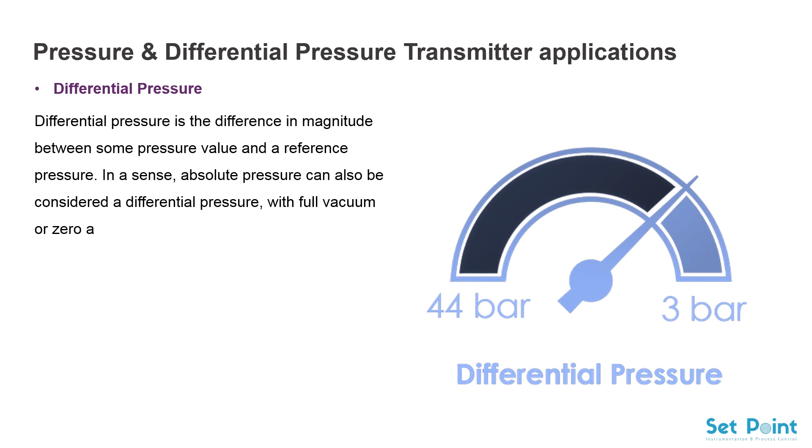Now let's get started. Pressure and differential pressure transmitter applications. Differential pressure. Differential pressure is the difference in magnitude between some pressure value and a reference pressure. In a sense, absolute pressure can also be considered a differential pressure, with full vacuum or zero absolute as the reference pressure. Gauge pressure too can be considered a differential pressure, since in gauge pressure the atmospheric pressure is the reference pressure.

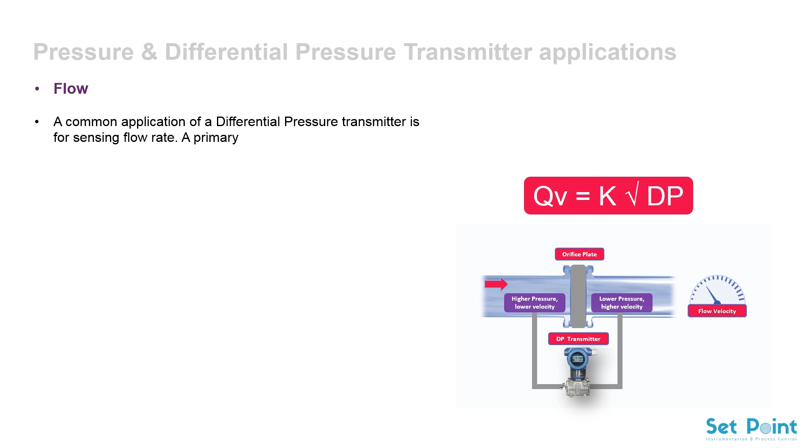Flow. A common application of a differential pressure transmitter is for sensing flow rate. A primary flow element has an internal restriction. This restriction reduces the cross-sectional area of the pipe through which the process flows. This restriction causes fluid velocity to increase as it passes by the restriction. Therefore, fluid immediately upstream from the restriction has a lower kinetic energy, speed, than the fluid immediately downstream from the restriction. This increase in kinetic energy across the restriction is balanced by a corresponding decrease in potential energy, static pressure.

Taps placed on either side of the restriction see a differential in static pressure produced as a result of this decrease in potential energy of the fluid. The differential pressure transmitter subtracts the downstream or lesser pressure from the upstream pressure. This pressure difference is generally quite low, typically from 1-inch water column to 750 inches water column, 0.24 to 186 kilopascals, depending on the fluid and flow rate.

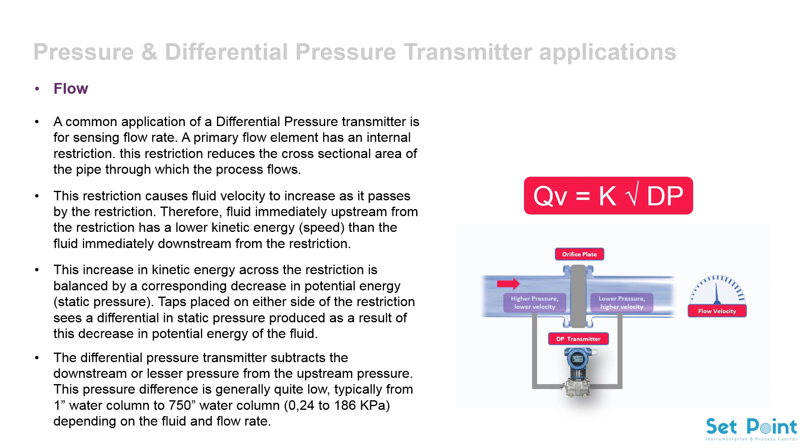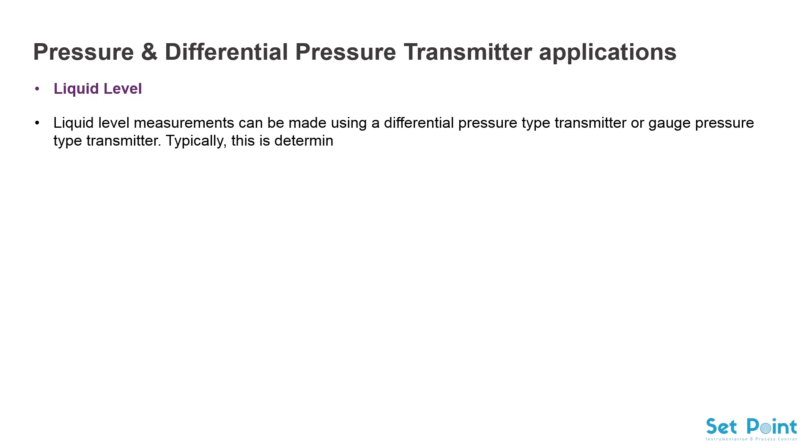Liquid level. Liquid level measurements can be made using a differential pressure type transmitter or gauge pressure type transmitter. Typically, this is determined based upon whether the tank is open to the atmosphere or whether it is closed. Liquid level, open tank. Open tank liquid level measurement means that the tank is open to the atmosphere. In open tank applications, any change in atmospheric pressure affects the process fluid pressure within the tank. In this type of level measurement application, the low side of the transmitter measures atmospheric pressure, thus cancelling out the effects of atmospheric pressure on the tank fluid level. The high side of the transmitter is connected to the tank and thus measures the actual level of fluid in the tank.

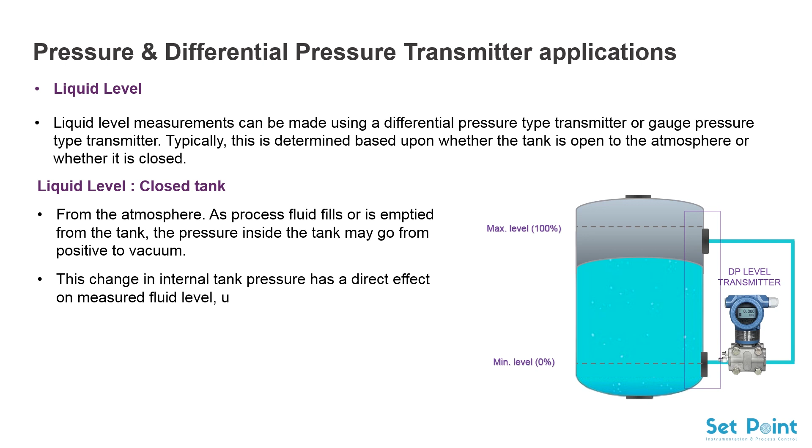Liquid level, closed tank. Closed from the atmosphere. As process fluid fills or is emptied from the tank, the pressure inside the tank may go from positive to vacuum. This change in internal tank pressure has a direct effect on measured fluid level, unless it is compensated for. Piping the low side of a differential pressure transmitter to the top of the tank easily does this.

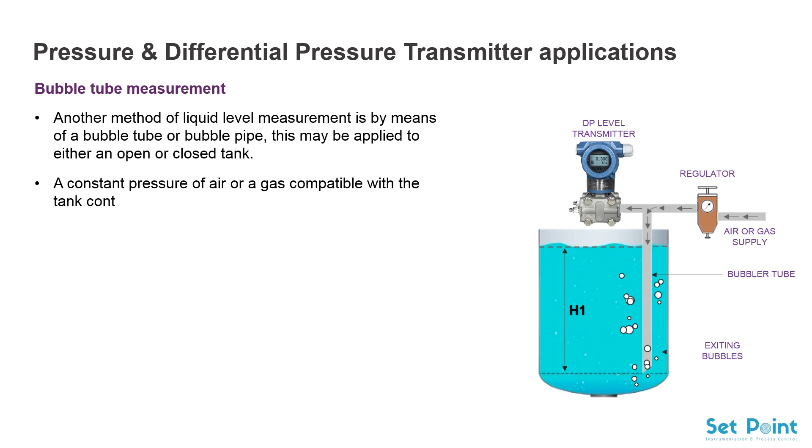Bubble tube measurement. Another method of liquid level measurement is by means of a bubble tube or bubble pipe. This may be applied to either an open or closed tank. A constant pressure of air or a gas compatible with the tank contents is maintained on the pipe inserted into the tank. As the level changes, the back pressure measured by the transmitter is a direct level measurement. The advantage is that only the pipe material is exposed to the process, not the transmitter. However, the process cannot be sensitive to a gas bubbling through it.

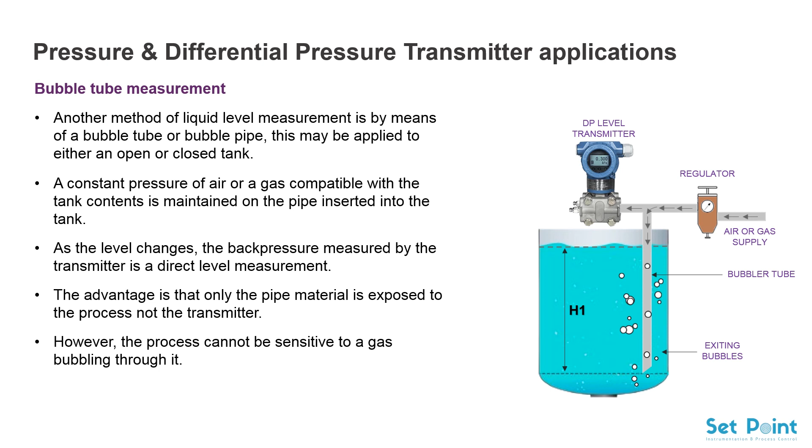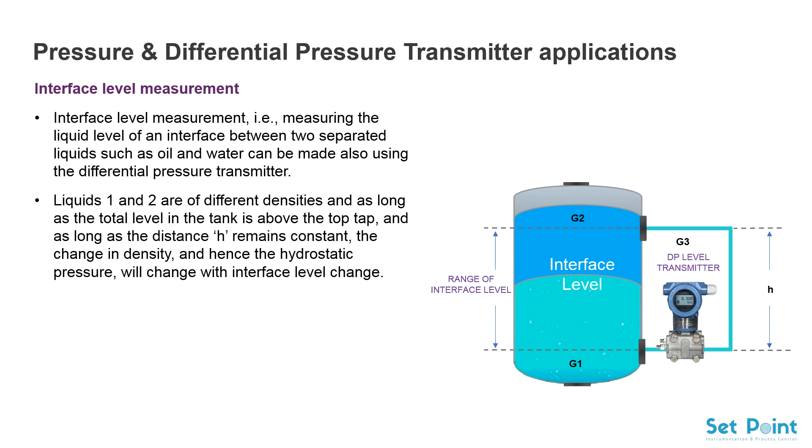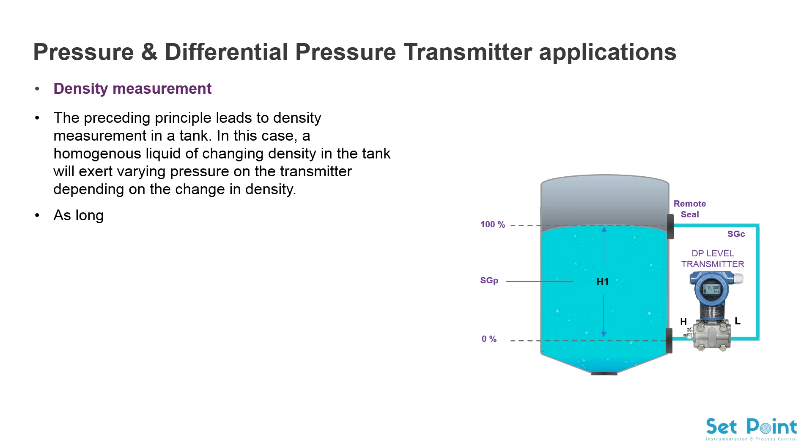Density measurement. The preceding principle leads to density measurement in a tank. In this case, a homogeneous liquid of changing density in the tank will exert varying pressure on the transmitter depending on the change in density. As long as the level remains above the top tap, and as long as h is constant, the transmitter will respond to changes in density. Density is weight per unit volume, kilograms per cubic meter. If the density increases, the pressure on the lower tap increases, and so does the transmitter output. Typically, as in level measurement, a differential pressure transmitter is used because the spans are relatively low.